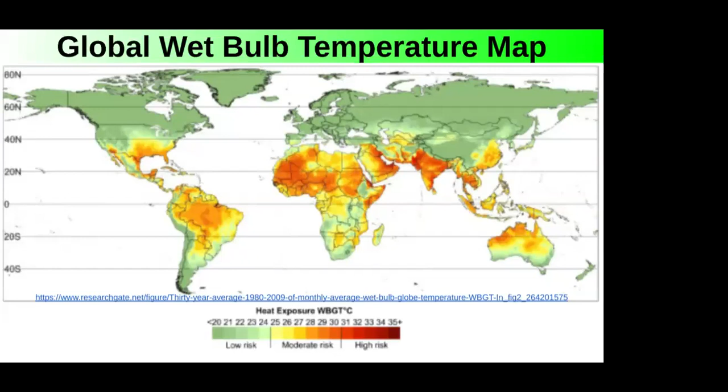So India, especially peninsular India, as you can see here, is at great risk for such heat waves coming in again and again. The only way to survive such heat waves is by sitting inside an AC. You can't go and do any work. If you go outside and walk around, you're likely to die.

If you are an auto driver without AC and you go out into this heat stroke thinking you can survive with enough water, you will die. Such instances of heat waves are going to go beyond the wet bulb temperature of 35 in peninsular India more often as we increase the amount of greenhouse gases in the atmosphere.

This is a threat that is going to happen, is happening, and we have to start designing our cities, our systems, not just our homes. We have to design entire communities, entire cities, entire countrysides, entire districts perhaps, to ameliorate such situations. This is what I would now call environment management, not just the municipal concept of picking up solid waste and all that. We have to start thinking of this as a system of systems, an integrated environmental management system.

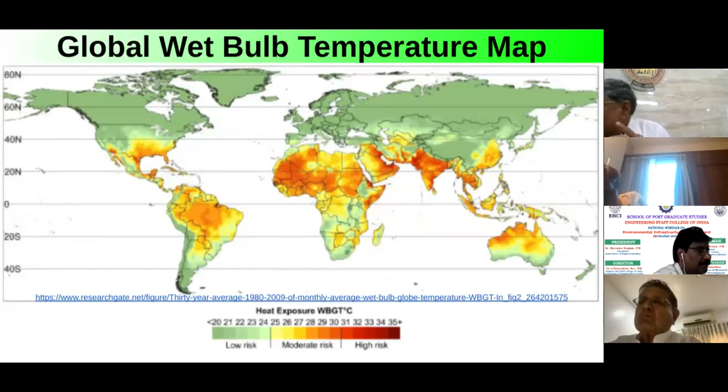Obviously, when such heat strokes and everything happens, there may be no other option. Suppose things go completely south, we have to find a place which is green on this map to survive, because once the wet bulb temperature reaches say 35 or so, even the plants you have, your agriculture collapses, people can't live, and you will have mass migrations. India is actually at the highest risk here, and we have to take drastic action to solve this issue now.

So what is integrated environment management? We have talked about the atmosphere, the hydrosphere, the lithosphere, and now I am putting in human intervention, or the human environment, because we have not only long-term or short-term threats due to climate, but also an economy we have to run. The good thing is sustainability, circular economy, and climate change are now things everybody is talking about, and there is a lot of business that can be done integrating all these things, which I'll talk about as we go ahead.

Now, for the atmosphere, we have to manage the wet and dry bulb temperature. We have to look at air quality, CO2, oxygen levels, SOx and NOx levels, VOCs, ammonia, H2S which causes bad smell, dust levels, and also noise. That is the atmosphere. How do you manage that? I'll talk about models and ideas as we go along.

The hydrosphere - of course the hydrosphere is massive. It's two-thirds of the Earth.

What we find is that human engineering has brought a lot of fresh water into our cities. The fresh water goes through our houses and converts into wastewater. The carbonaceous waste that we as humans generate in our highly dense colonies then goes into an aquatic environment not suited to handle it. As I pointed out in the carbon cycle slide, it's very difficult—you need to give a lot of energy to put oxygen back inside that water.

Now I'm showing you this picture of the Amazon. You see these small popcorn-like clouds in this satellite image. This is actually the Amazon sucking up groundwater from the root zone of the trees, converting it into water vapor in a process called transpiration. This rises up in the atmosphere and forms these clouds. So in the dry season, the Amazon rainforest creates its own thunderstorms—you see some of these thicker clouds, they're actually thunderstorms.

And what happens is this triggers the release of heat in the atmosphere and changes the trade winds, which then comes and dumps a huge amount of rainfall again in the Amazonian basin.

Now, people don't realize, but India, maybe about 3,000–4,000 years ago, was also a dense forest, very similar to the Amazon. Many of us in our mythological epics may have heard of Aranya—Lord Rama went from Ayodhya and Kishkinda down south, and he crossed these massive forests. This was the case until recently, that only in the last 1,000–1,500 years have many of these vast forests been converted into farmland.

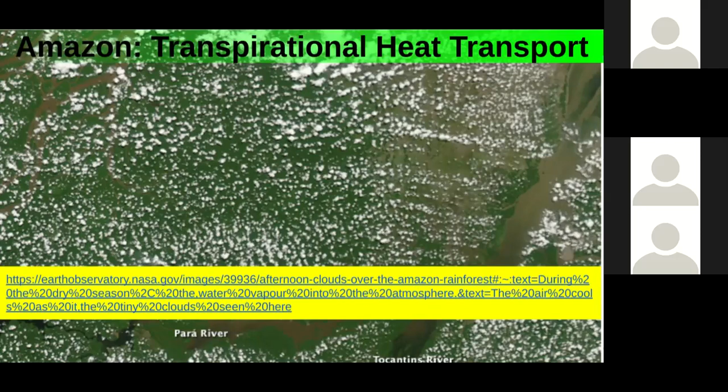Now, how can we do things at small scale that can help us create what I call these transpiration engines across India? There are lots of interesting ideas that have been tried.

We know that in India, sewage is being used by many farmers for agriculture, so that is well known. But a lot of the sewage generated by many of our cities is being discarded. Of course, a lot of STPs are being made, and that's a good idea.

But one of the things that many cities should consider is called sewage irrigated forests, which converts the wastewater generated by our communities into dense, economically productive forests that give raw materials for building, like bamboo, cane, shisham, eucalyptus and many other things—biologically fixing the wastewater, photosynthetically taking CO2 from the atmosphere and fixing it as living carbon in these forests, which then become our cities.

So rather than mining the earth and converting it into cement and steel buildings, we can actually start looking at agroforestry using the wastewaters of our cities, and using a lot more renewable resources like wood to create our living spaces.

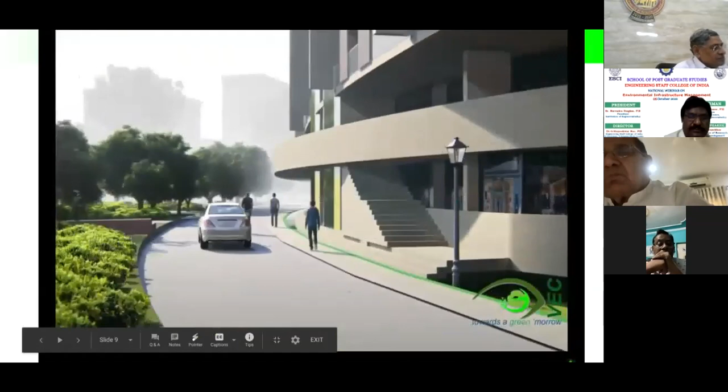So what we have is a built space—here a standard framed RCC construction, able to sustain a mixed-use population of about 10,000 people with retail space, office space, living space, recreation space, all with a very fundamental design where we leave the ground to become what is called a natural sponge.

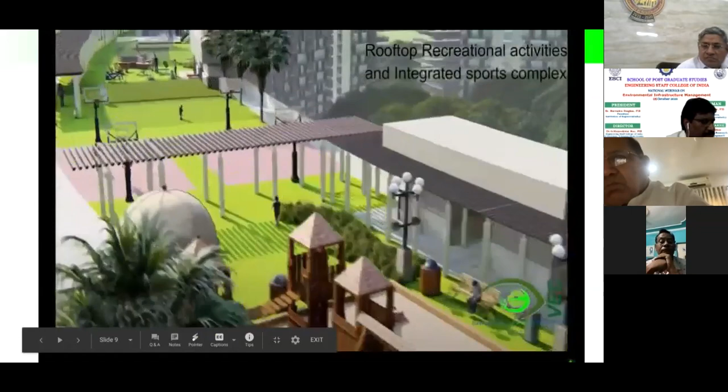So all the recreation areas are moved to the top of the terrace, which is also a green terrace. The residential frontage looks on the inside, which is the environmental forest—you may call it the sewage irrigated forest or a treated water irrigated forest—which is used for heat management.

This actually uses the wastewater generated by the community to create this lush, dense rainforest inside your complex, your mini Dandakaranya, if you want to call it that. And this is a place where you can interact—not just a space that humans use, but a space which wild animals can use too.

Rainwater that falls on this is captured completely, and with permeable pavements it is pushed into the underground aquifers of that area, so that we are designing a city or community that is net zero, or doesn't need to bring in water from outside. It is able to harvest its own wastewater and rainwater, enough for its own water needs.

Duck farms can be put in, fish farms can be put in. This is a nature-based wastewater recycling plant, which we have done about 140 MLD across India already. We have a solid composting system, and a facility to break down furniture and other utilities you use in daily life, to make something else out of it or use it for other projects.

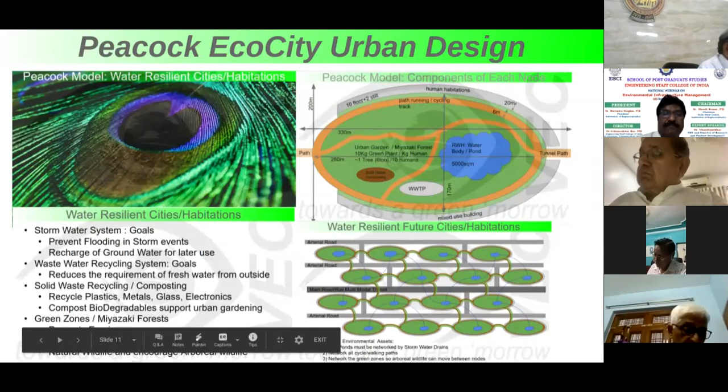Okay, so there are other concepts. We have many requirements for creating such water holding ponds and rivers and maybe contour dams in your locations. You can convert, or make very interesting features integrating nature with ponds and water holding features, so that you get this integrated use.

So this is a concept developed by Vision Earthcare using what is called Aranya Dwip, which in Sanskrit means a forest island. What we do is take an existing lake, or create a water holding feature, because we need to conserve water.

And that is by taking flat land and digging that flat land. Whatever earth comes out, we then make these islands. We convert those islands with these native forest species.

The monsoon rain comes and inundates this region, making it into this monsoon pond. The trees and forests grow in it, which is not a space for humans - it is a space for our fellow beings on earth. It is the wildlife, the storks, the squirrels, the foxes, the alligators. All of these also have a right to live in our environment, and these forest islands are a sanctuary for them.

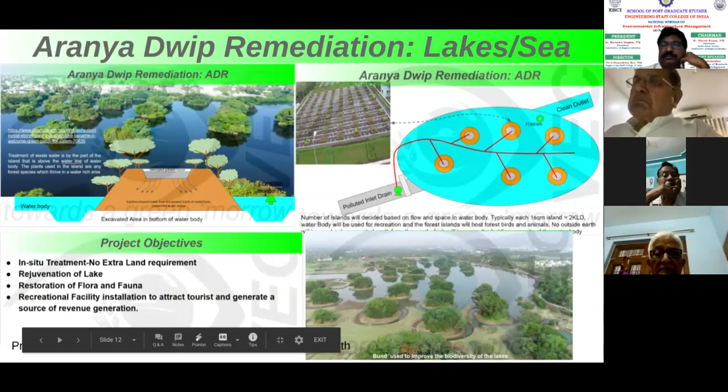The water itself will be used via the aquifer for human use. The pollution we create can be treated within these forest islands using many nature-based technologies, which I'll talk about. The first one is this SBT technology.

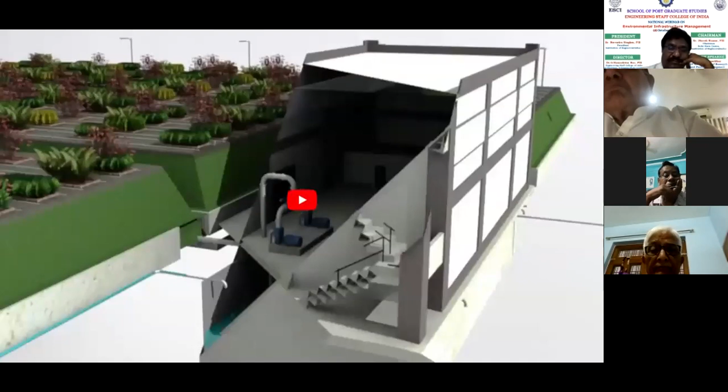So this is the CAMUS-SBT type wastewater treatment plant, which essentially uses soil bacteria and soil ecology to treat wastewater. These are some plants that we have implemented. This one, right now in these pictures, the trees have become much bigger - I'll talk about this in the next slide.

Our oldest installation is from 2005. You can see here that people are actually living in front of an STP, not realizing that there is an STP here. Okay, so this is a concept of the first Peacock EcoCity.

It is not fully an EcoCity because we have not implemented the heat island or heat zone cooling system, and the forest zone we have not implemented in this. But the treated wastewater is being used for dust abatement purposes across this entire society.

The roads are washed with the treated water, cars are washed with the treated water, and flushing is done by treated water. So they are using only 60 liters per person per day of water in this society, compared to 135 that a standard municipal authority has to provide. South Bombay uses about 200.

We've done a few airports. We can do individual houses. This is the BMC plant where the treated wastewater is used for the Bombay Presidency golf course and the Wellington golf course.

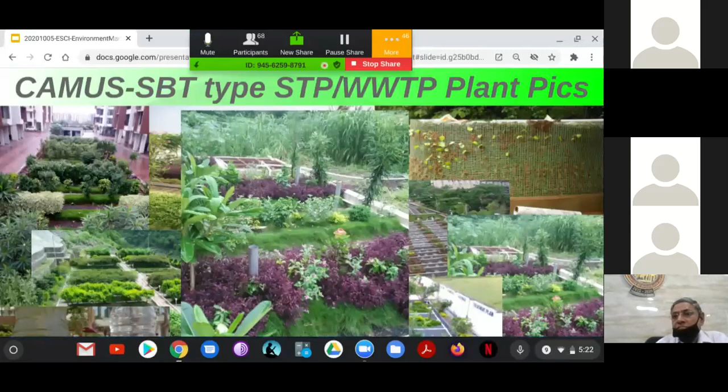These are some small interventions for environmental assets, since we are putting all these non-biodegradable plastics into our water streams, rivers and oceans. There are interventions we can start doing so that we at least do the minimum with minimum effort. This isn't on the scale of global climate change, but let's start small. These are interventions all cities can implement so that plastic waste, which is now causing destruction of fish and marine habitats, can be sequestered at the point of generation itself.

In many of our cities, during the rainy season, plastic detritus that people have thrown here and there gets washed into our drains. We can actually use the power of nature itself to collect that at the beginning of the rainy season using these net bags.

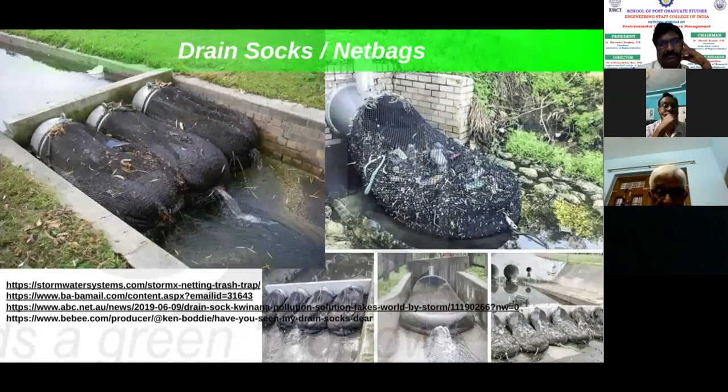There are other concepts already implemented in India. This is somewhere in Chennai, where there is a floating trash barrier on the Cooum River that captures all the floating waste. What you're seeing here is approximately 30% plastic waste, like thermocol, floating bottles, bottle caps and many plastic items, with the rest being things like food waste and plant waste. Such interventions ensure it doesn't cause aesthetic depreciation of your water bodies.

That's a very important thing that can be immediately implemented at low cost. This is a floating trash barrier on the Cooum River, I believe, or maybe in Pondicherry, I'm not very sure. This is being done by a company in Bangalore called Alphamers that works with us.

This collects all the trash. It's designed so that all the trash is brought to the side of the river, so you can use a JCB to take it to a recycling center, where you can either convert it into value-added products, or use it to create artificial fuels or building materials. There have been lots of interventions where you take plastic waste and melt it into plastic-enriched roads, which have higher performance characteristics.

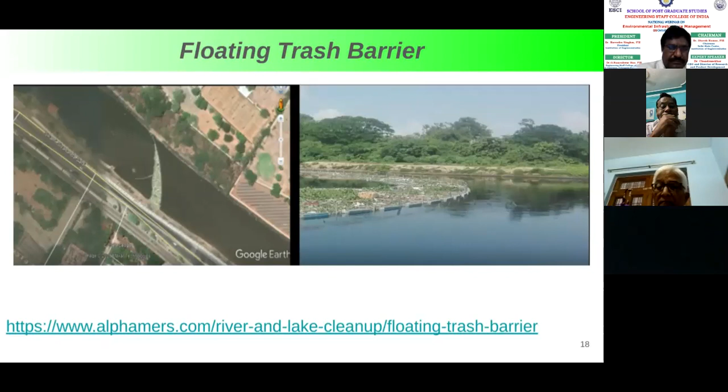You can monitor our assets. Before we can do any kind of understanding, we must measure the quality of our environmental assets. So we have a system that does floating online quality monitoring of our rivers. If you want to monitor the quality of Hussain Sagar Lake, you put in a floating device which measures COD, BOD, and TSS, and things like that.

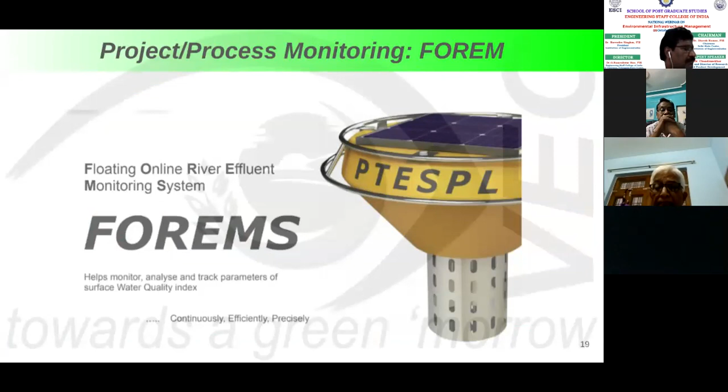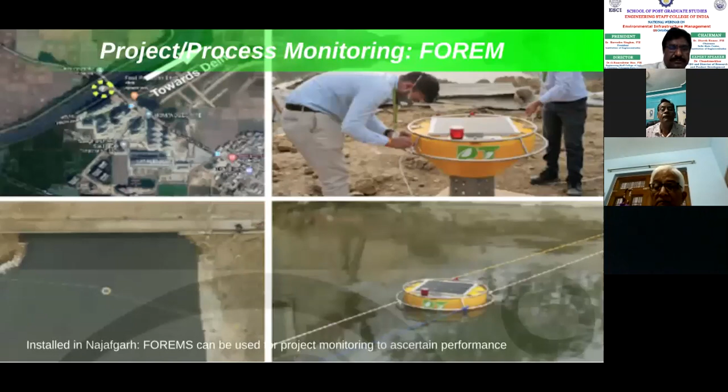Interestingly, one such device was placed in the Najafgarh drain in Delhi, and it collected data before the COVID lockdown started, which is an interesting thing we did with our equalizer system, the FOREMS system.

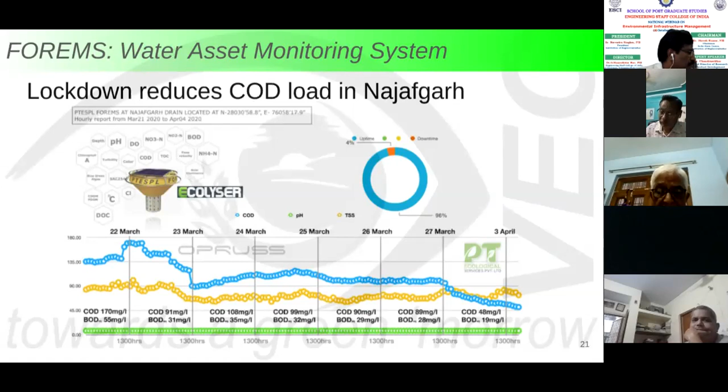So coming back to how we as a society can handle all these things, the ideas and interventions we had talked about have many options in turning into businesses and jobs. So I'm going to list out some ideas that people can do in order to take what is considered waste and then create value-added products and services.

Governments have a very large role in the implementation of such things. For example, I know I can do this, but unless the government agrees to procure that for its own tendering systems, it doesn't have a ready market. Once the government becomes a large market, it gives you that economy of scale, and the private sector very quickly follows in utilization, because now they know the government is an anchor buyer. It will always buy the base loads, and the private sector can then come in and procure things knowing that the supply is there. So when I say things like recycled plastics, or recycled plastic-enriched roads, and many things like that.

So there is one - asset utilization. Many of the environmental assets that have been created are not being utilized efficiently. Things like you have a lake - developing it, not just developing a lake, but also using that lake for fisheries or for duck farming and things like that, has a value-added component to it, has a tourism component to it. The governments and the people and the communities have to come together in order to create some new methods of entrepreneurship, which is enviropreneurship, which we should now look at.

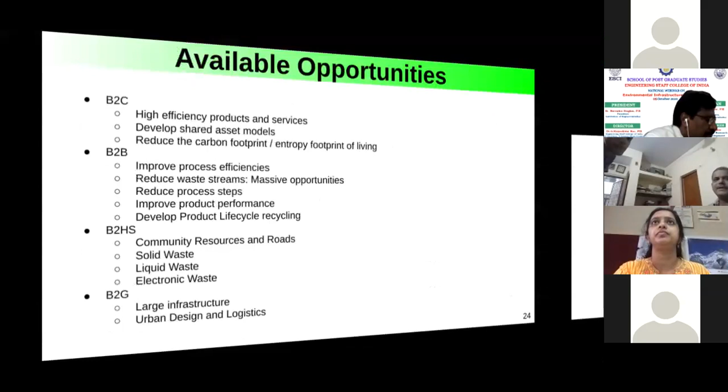And with that, I am mostly coming to the end. If there are any questions, I can answer them now, but I am done.